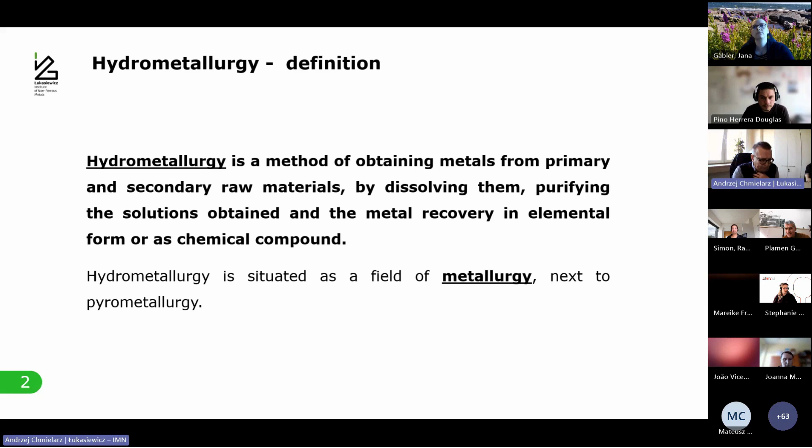We all know that hydrometallurgy is situated as a field of metallurgy next to pyrometallurgy. Hydrometallurgy, currently defined, includes several areas of basic and applied research. The first, which we will today be talking mainly about, is extraction or leaching and recovery of metals from primary and secondary raw materials. Next is separation of solution components via different techniques like IX, SX, precipitation, crystallization, membrane techniques, etc. Next area is electrochemistry in aqueous solutions, organic liquids, and molten salts.

Purification of waste solution with techniques of environmental remediation are included in hydrometallurgy too, and very important - mass production of metal salts and corrosion in aquatic environment.

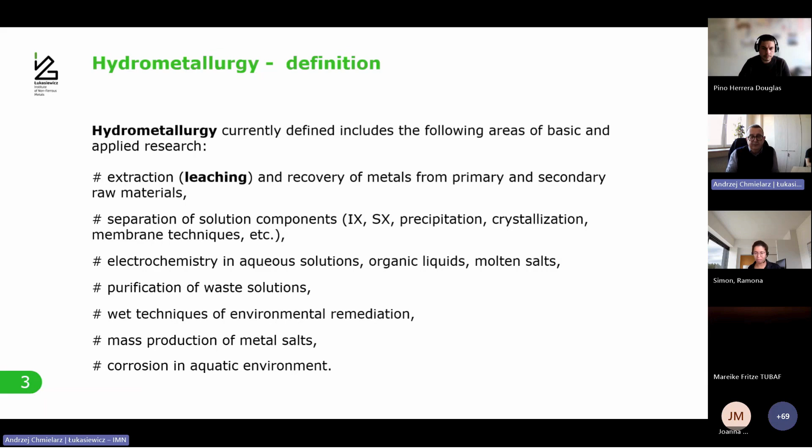Of the techniques mentioned here, leaching is special because it occupies the basic place. So let's go back to the definition for a moment and try to define leaching. Leaching is the operation of dissolution of solid raw materials in a liquid phase due to chemical reaction between components of solvent and raw materials.

I think there are two very important properties or parameters in this definition. The first is that we have to have two-phase materials, solid and liquid, and a chemical reaction must proceed between these components.

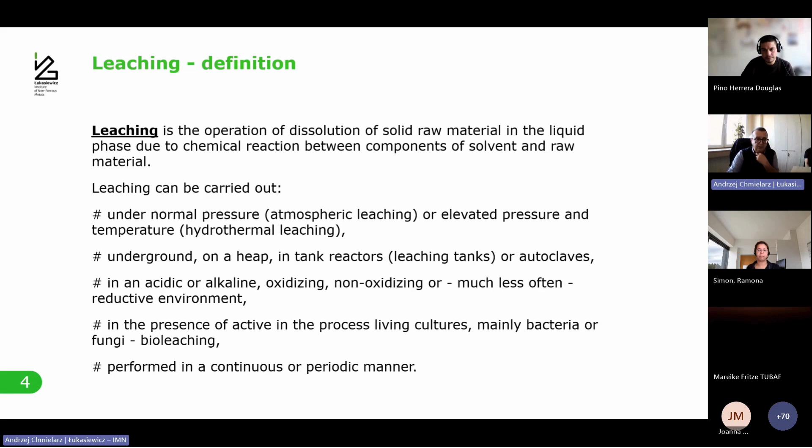Leaching can be carried out under different conditions: under normal pressure, when it is called atmospheric leaching, or elevated pressure and temperature, which we call hydrothermal leaching. You can do it underground, on a heap, in tank reactors, leaching tanks, or autoclaves, in acidic or alkaline, oxidizing, non-oxidizing, or much less often reductive environments, in the presence of active living cultures in the process, mainly bacteria or fungi - and in this case we've got a process called bioleaching. Leaching can be performed in a continuous or periodic manner.

Leaching, like any other technological process, is described by a group of technical parameters: composition of raw material and the leaching medium, ratio of solid to liquid phases during leaching or concentration of the slurry, temperature and pressure, leaching time - sometimes called retention time - and other hydrodynamic conditions. The result of leaching is usually determined by the composition of the obtained solution, unsolved residue and off-gases, leaching efficiency of the essential components of raw material, leaching balance, unit consumption of reactants, energy, and so on.

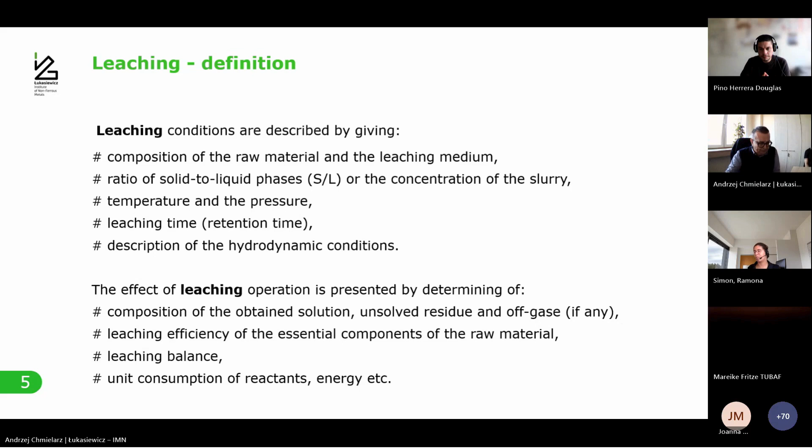So let's go to the basic leaching methods, starting with leaching on the heap. This technique is commonly used in production of copper from oxide type copper ores, and you can see on the left a simplified diagram of the operation. Raw material is built in the form of a heap after crushing and agglomeration.

Lixiviant solution is applied from the upper side, and pregnant solution is received from the bottom side. Sometimes air is pumped through the heap, especially when bioprocesses take a significant part in the whole leaching process.

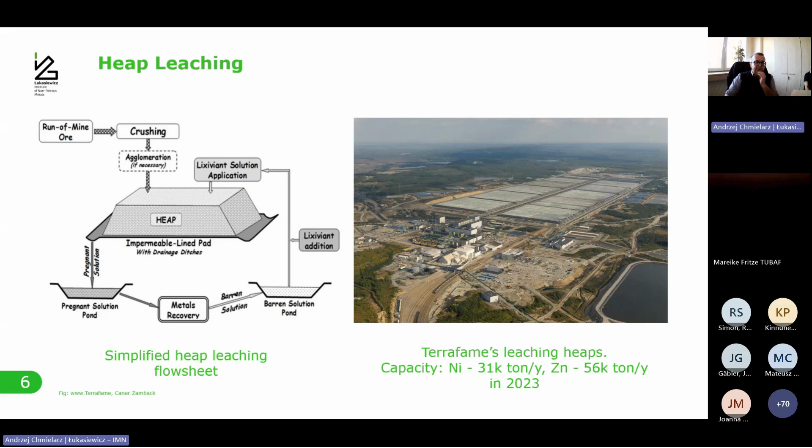Next, the most popular, tank leaching. Leaching is carried out in simple vessels equipped with a stirred agitator. Sometimes this vessel is equipped with a cooling or heating jacket, and baffles inside to improve hydrodynamics inside the reactor.

On the picture on the right, you can see a view of Cobre Las Cruces plant, which is one of the full hydrometallurgical plants, the second in Europe. The technology is based on tank leaching.

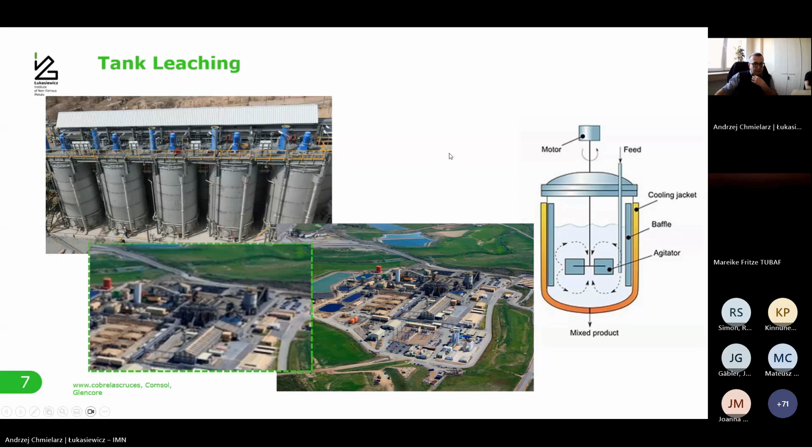Very interesting and technically not so easy to design and afterward perform is a process which needs three-phase reaction. It means that within the reactor we've got solid materials, leaching liquor, and the third gaseous phase. It is usually oxygen, air, or a mixture of air and oxygen.

Here we've got a tank which is used in the so-called Albion process. What is interesting in it is this nozzle through which gas is transported into the tank at over sound velocity. On the right side, you've got the next possible construction, very similar to a flotation cell with an aerator, through which air is added to the reaction mixture. This type of reactor was constructed in our institute, and they were, for example, industrially implemented to oxidize liquid coming from a sodium desulfurization plant.

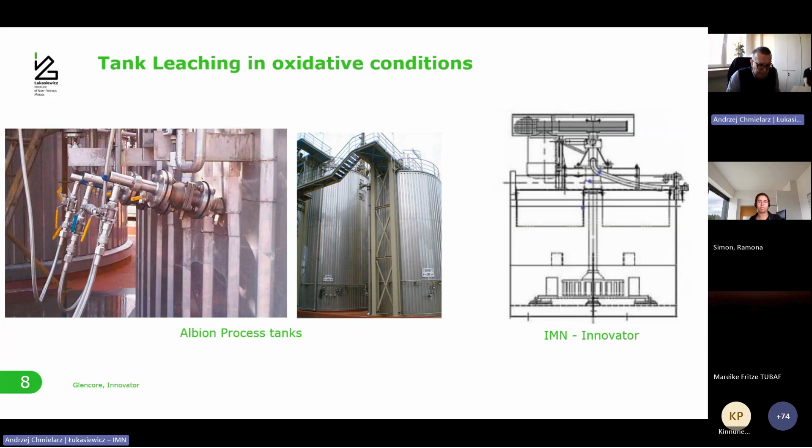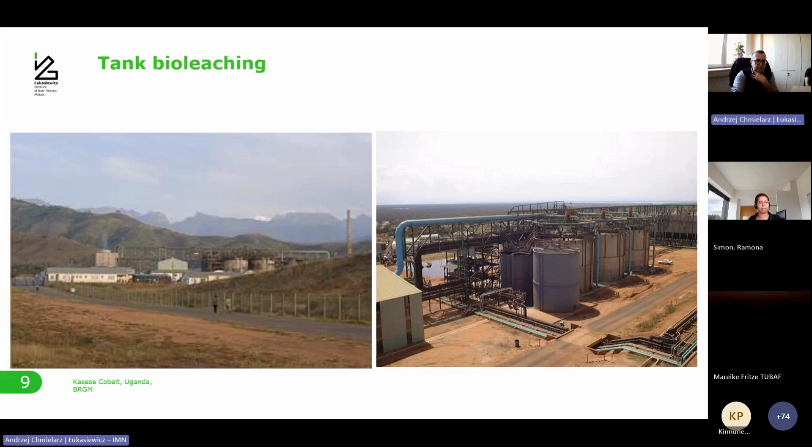And finally, hydrothermal leaching. The heart of hydrothermal leaching is always the autoclave. Here you've got the horizontal drum autoclave, in which the process takes place from the upper side: raw material and liquid are pumped into the autoclave. From the bottom, oxygen as oxidative agent, and steam for heating and to keep the proper pressure, are delivered.

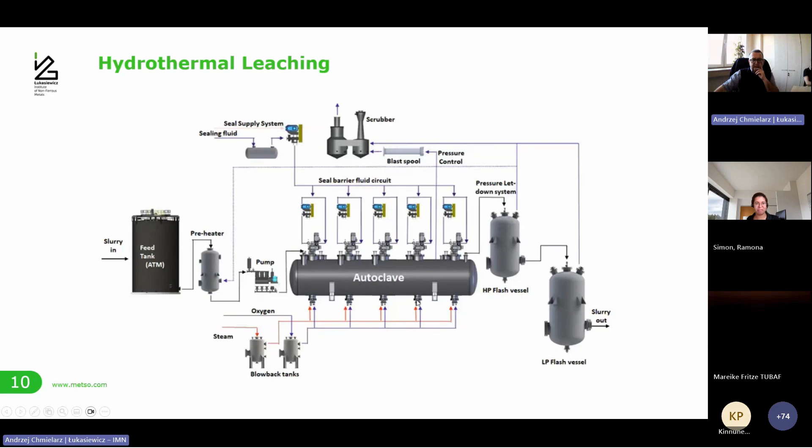Next, the pressure oxidation process is usually implemented in the gold industry for refractory gold ore, which means the main phase of the ore is pyrite, and before oxidation and leaching of gold, this pyrite must be removed from the raw material.

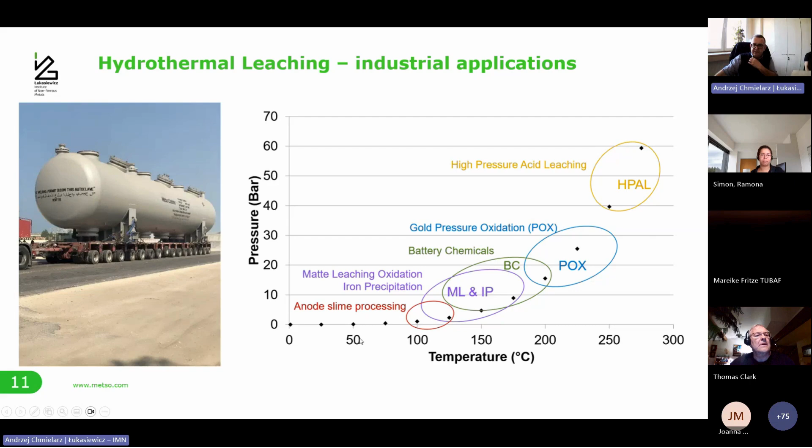And finally, as I said at the beginning, leaching tanks are used for batches, but if you arrange them in a series...

Short interruption. Maybe if we could come to an end quite soon. Yes, that would be great. Thank you, two slides.

And if you arrange them in a row, you can produce plenty of solution. This type is implemented mainly in zinc electrowinning.

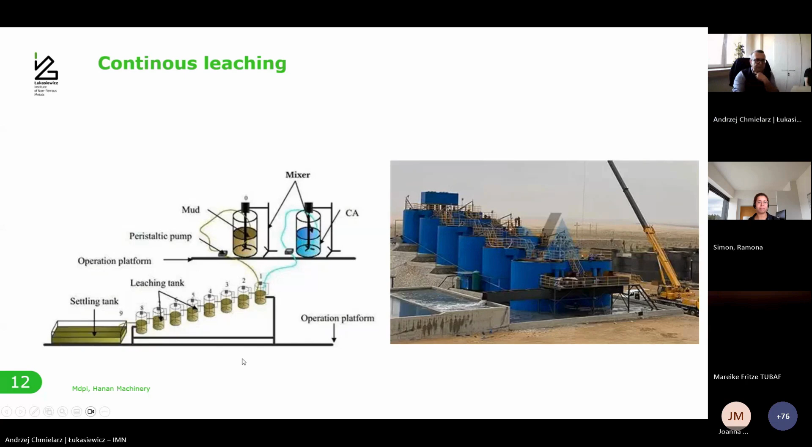And the last slide, on advantages and challenges for hydrometallurgy and leaching. As advantages, we can say that hydrometallurgy is high, but not always satisfactory, in kinetics of leaching and leaching efficiency. Leaching tanks are relatively simple in construction, especially those operating under atmospheric pressure, and there is virtually a very high limit on the volume of leaching tanks, up to 1,000 cubic meters.

In leaching tanks, we can conduct three-phase redox processes. And what is very important, it is possible to use polymer plastic as a structural material for reactors, even for temperatures over 100 degrees Celsius.

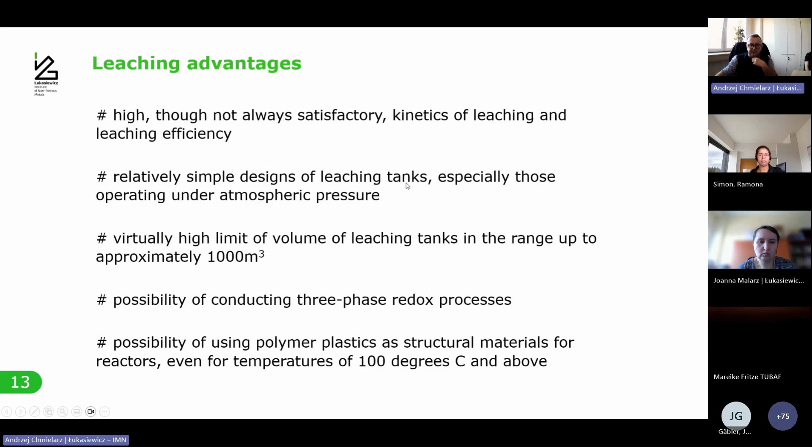And finally, challenges for hydrometallurgy and leaching process. The first is, in my opinion, reduction of cost of preparing the material for leaching. I mean crushing, grinding, and so on.

New designs of agitators and aerators are needed to minimize energy consumption, as well as development of high pressure, high temperature leaching.

And finally, we need, and it is, I think, a problem on the scale of the world, the development of methods to reduce the discharge of solutions of simple inorganic salts from wastewater treatment plants. This problem is a bottleneck even now, and can become a factor that significantly limits and sometimes eliminates the use of hydrometallurgical technology at all. Thank you very much for your attention.

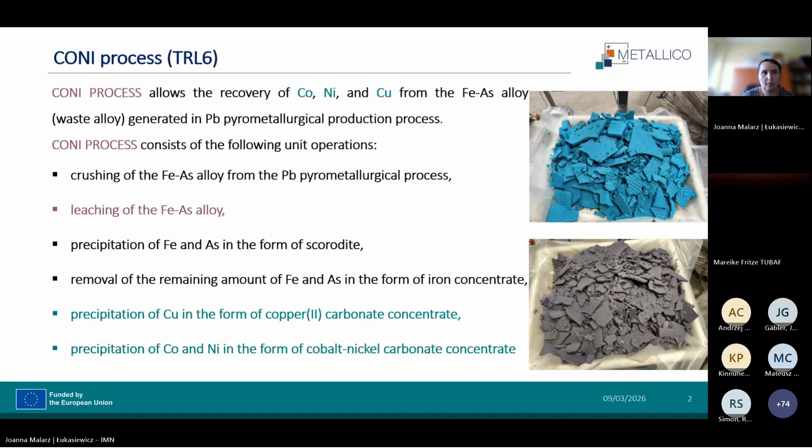The iron arsenic alloy is a polymetallic material composed mainly of iron and arsenic. A typical alloy contains about 40 to 55% iron and 25 to 35% arsenic. Because of its high arsenic content, this alloy is classified as hazardous waste and is usually deposited at designated industrial landfills.

The alloy used in our research contained about 55% iron and 24% arsenic, as well as around 7% copper, 2.6% cobalt, and less than 2% nickel. The main components of the alloy occur in metallic form.

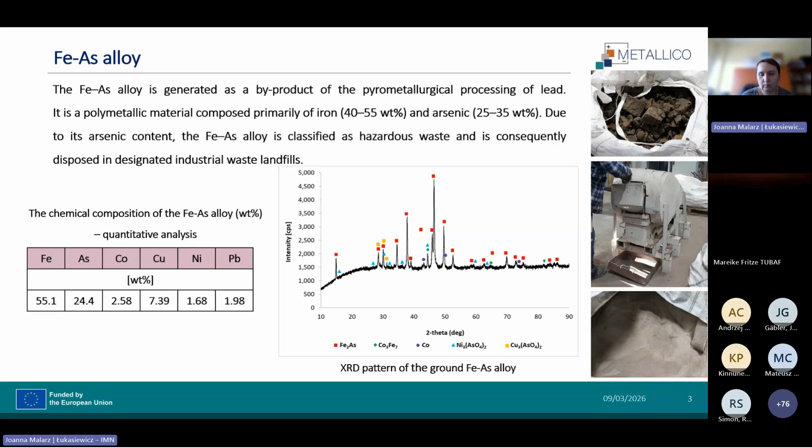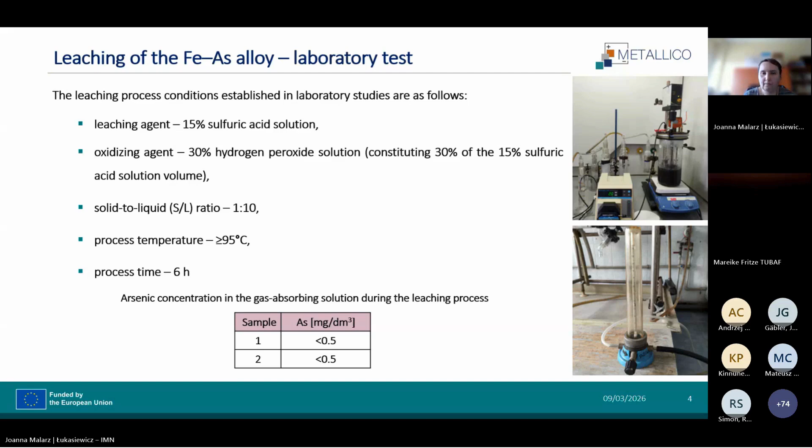Based on the laboratory results, the next step was the development of a pilot scale installation. The Łukasiewicz-IMN Institute supervised the construction and operation of the pilot plant at its facility. Some modernization of the installation was required to perform the pilot experiments. The most important upgrade was the purchase and installation of a new reactor, along with all necessary equipment. The pilot plant has a capacity of 100 kilograms per day.

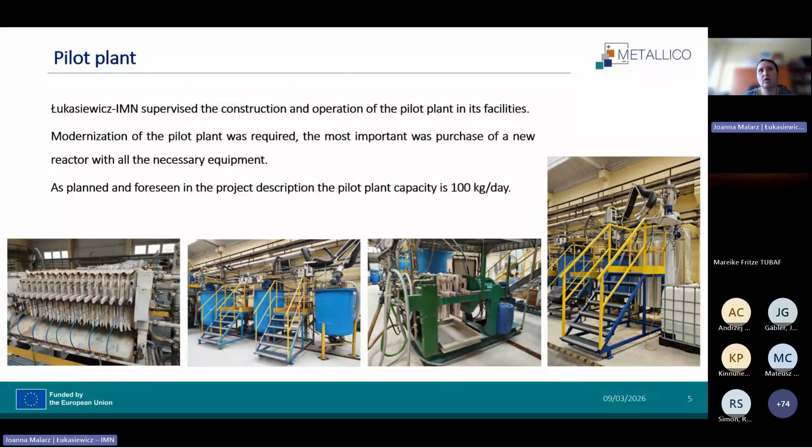When selecting the material for the pilot scale reactor, it was important to ensure high resistance to abrasion, high temperatures, and strongly acidic environments. Two materials were considered: acid resistant stainless steel, such as 316L, and a duplex alloy, for example grade 2205. They were compared in terms of mechanical strength and corrosion resistance under the expected process conditions.

Due to its significantly better corrosion resistance and mechanical durability, the duplex alloy was chosen for the reactor components in direct contact with the alloy and the leaching mixture.

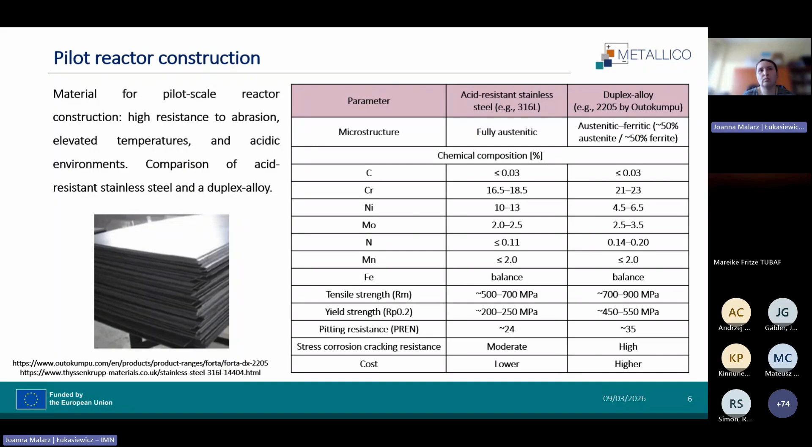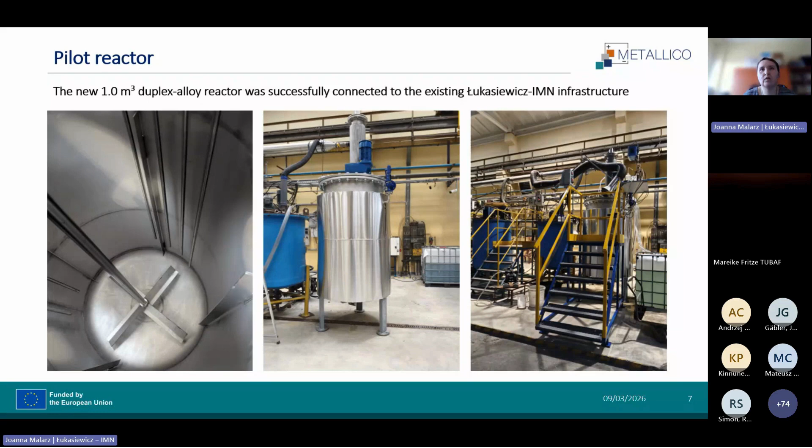A new reactor with a volume of 1 cubic meter made of duplex alloy was constructed and successfully integrated with the existing infrastructure at Łukasiewicz-IMN.

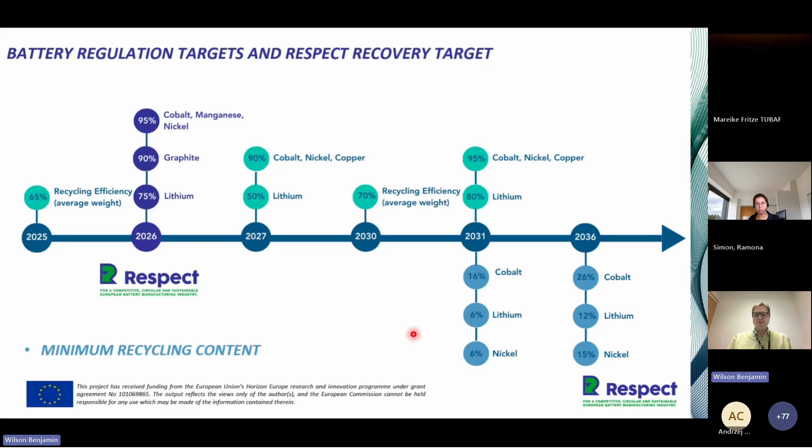So we're talking about hydrometallurgy here, as was explained nicely in the first two presentations - this is atmospheric on a lab scale. We use a 1 litre jacketed glass reaction vessel, with temperature control via a water bath on the outside. There's a 4-blade PTFE impeller with a 5 centimetre diameter and a 45-degree angle, providing the agitation that's quite critical for these kinds of processes. In this case, the stirring was provided overhead at 300 RPM.

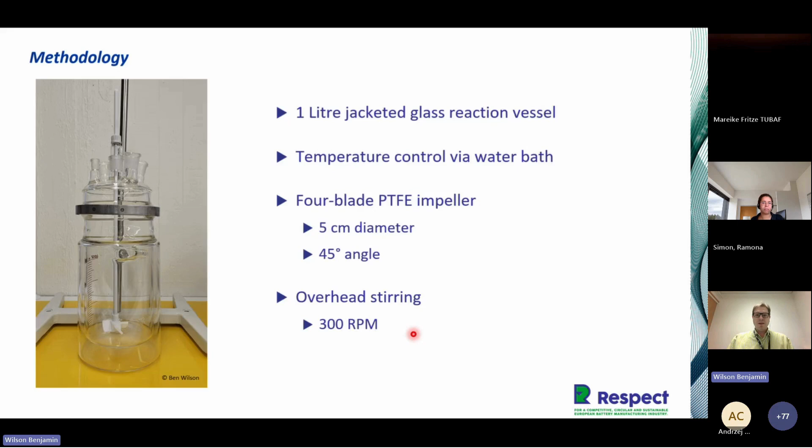What does that look like in reality? You can see it there on the left - there's some black mass being leached by 2 molar sulfuric acid, our lixiviant. It's an industrial black mass from lithium-ion batteries, NMC111, so nickel, manganese, cobalt in relatively equal proportions.

The critical thing mentioned as well is the solid-liquid ratio. The ratio we used here was 200 grams per litre, more reflective of industrial levels of solid-to-liquid ratios. The actual material had a combination of lithium, cobalt, nickel, manganese, but also copper, aluminium and iron. The last three particularly come from either the casings or the electrode materials, which are also within the battery elements, not just the active materials containing lithium, cobalt, nickel and manganese.

Part of this was to look at the process as a whole, and what difference the addition of reductants could make. We had a nice highlight from Joanna about the use of peroxide, but peroxide itself can be quite expensive and has a well-known high carbon footprint associated with its manufacturing process. So we tried alternative reductants - in this case iron sulfate, but also copper - that's recovered from the battery electrodes, exploiting materials like copper, aluminium and iron already within the black mass, so we don't have to add so much reductive material.

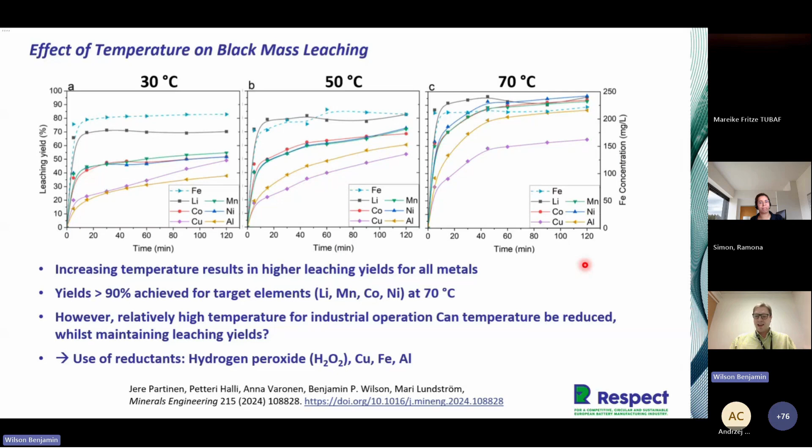Was that possible? Using reductants - hydrogen peroxide, as I said, currently has wide application in industry, but we're trying to look at whether copper, iron, and aluminium could have an impact as well.

So why these alternative reductants? Well, in fact, most of these NMC materials, some of it's quite easy to leach in the first instance, just with the regular acid, but some components of the NMC crystal structure are actually quite hard to break down.

So the idea of using the peroxide as an extra reductive agent, but actually the use of iron in conjunction with copper and aluminium can provide a reductive process as well due to this electron shuttling between the iron and the copper and the aluminium. So you can get some electron transfer, which causes the oxidation and reduction process to be enhanced compared to without the presence of these metals.

So this is just a quick overview of the kind of materials that we were looking at. So how did we approach this?

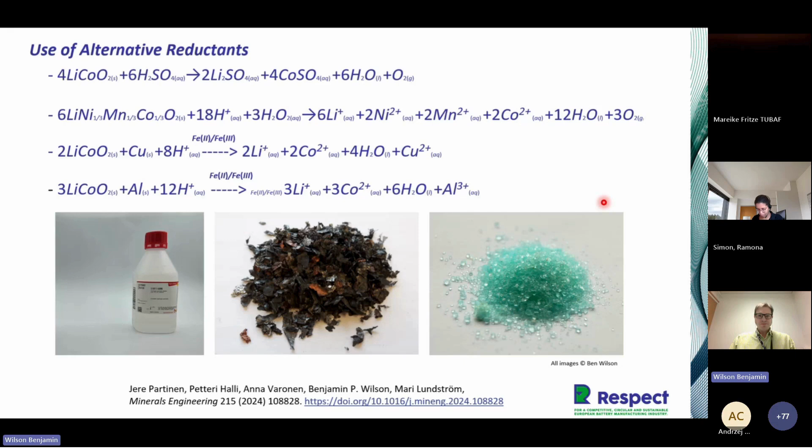Well, we took a design of experiments approach, also known as DOE. For those of you who don't know, this is actually a statistical tool. It allows you to assess the interaction of different effects between multiple variables. It's based on regression modeling, and it's used to construct models that, in this case, was looking at predicting leaching yields from our industrial black mass.

The parameters we selected for this investigation included temperature, the concentration of iron, not just what was already in the black mass, but what we added in terms of the iron sulfide and sulfate, and also the additions of copper and aluminium or peroxide.

And then the models were fitted with a partial least squares model. And you can design the sort of experimental protocol. There are programs to help you design this, so you can have different experiments with different levels of iron or copper and peroxide, and this provides you the information to base your statistical model on afterwards.

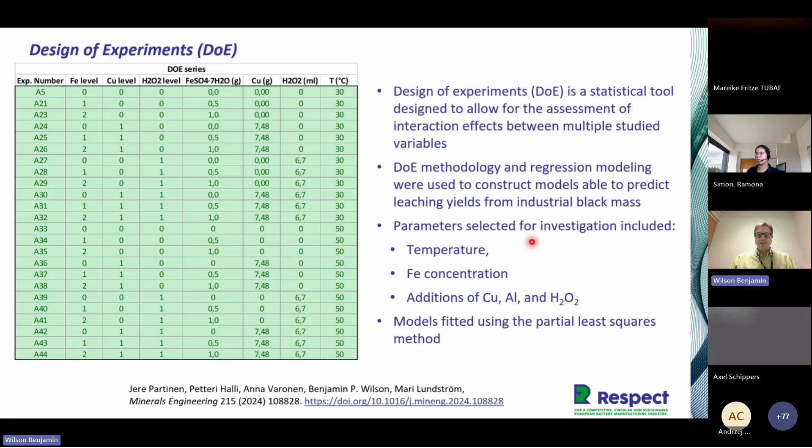Just a quick example, as we've not got a lot of time today. So just thinking about what we saw at 30 degrees without any reductants, the levels of leaching of the key metals was relatively low. But as you can see here, even at 30 degrees with the addition of iron reductant at 0.4 grams per litre or

0.6 grams per litre, there's been an increase in the leaching of the metals of interest, still relatively conservative, 50-60% for cobalt for example, but this is still an improvement at a temperature of 30 degrees compared to without any reductant whatsoever.

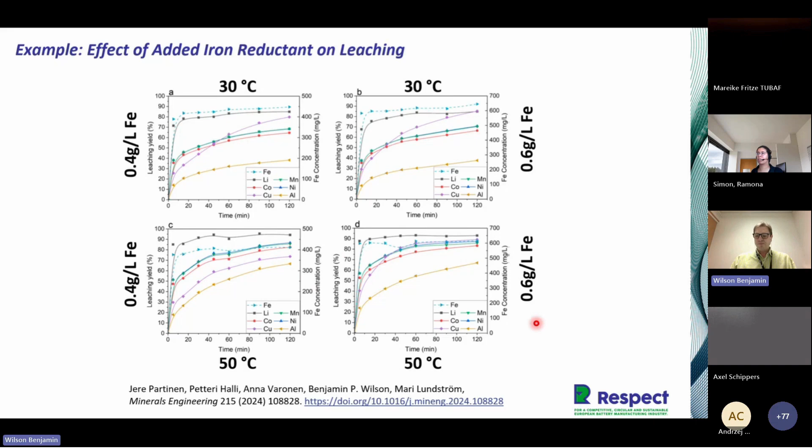But as you can see, once again, once we increase the temperature to 50 degrees, there's an increase in the amount of leaching yield or recovery of the metals into the pregnant leach solution that start to reach more appreciable levels up towards 90, the targets that we have there. So that was just a quick snapshot of the data.

Of course, we had a lot more data if we think about the table of experiments that was listed on one of the previous slides. But it was clear from our results that temperature is the most impactful factor for all the elements, thinking about cobalt, nickel, manganese and lithium in this case. And temperature was found to be especially key for lithium.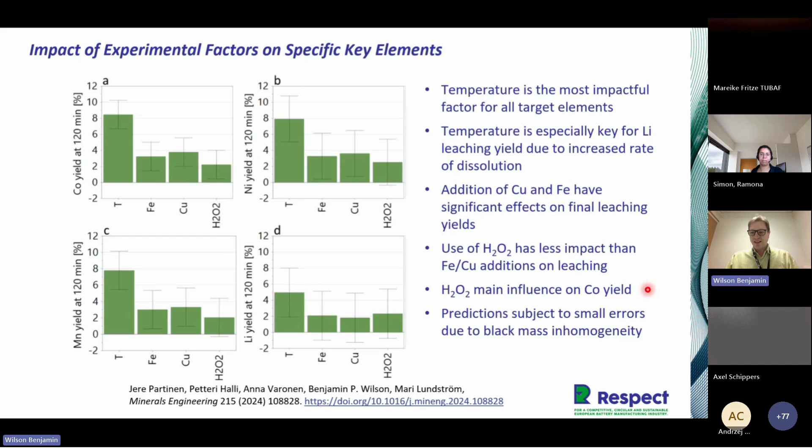But such predictions are subject to small errors due to the black mass inhomogeneity. Of course, black mass, it's normally in this case was 111, but it comes from different sort of input streams. So in fact, the amount of material in each yield varies somewhat based on that.

But what kind of results could we get out? Well, we can do some contour plots. This is for cobalt at 30 and 50 degrees, where we have copper and peroxide as the variables. In this case, the temperature was 30 degrees and the iron level was quite low at only 0.2 grams per litre. As you can see here on the left, the lines are almost diagonal. We have peroxide there on the left axis and copper amount along the bottom axis. And these are kind of like at a 45-degree angle.

So that would suggest, when comparing copper versus peroxide, that the copper and peroxide have similar impact on the leaching yields, at least after 2 hours at 30 degrees.

Whereas if we look at 50 degrees, you start to see a change from the 45-degree angle towards more vertical. This means that the peroxide addition actually has, at this temperature, only a weak impact on the leaching yields. So it's actually the copper addition that's having the most impact rather than the peroxide.

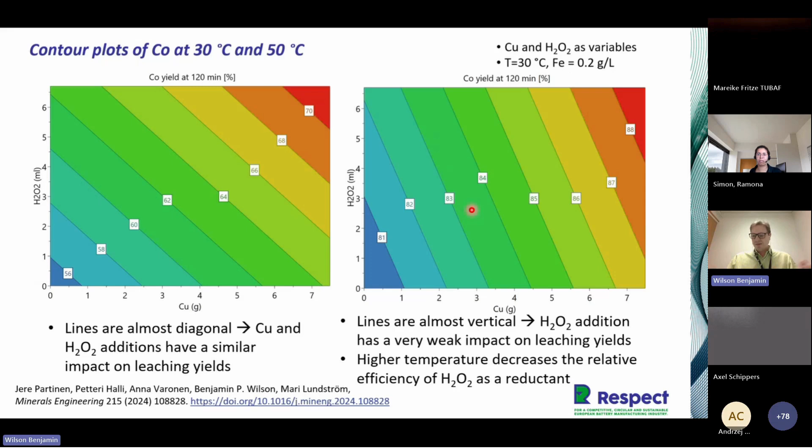And this is not a surprise, as higher temperature is known to decrease the relative efficiency of hydrogen peroxide as a reductant. So as you increase the temperature, the peroxide can actually break down rather than participate in the reduction of the cobalt or the NMC. It can just break down due to the temperature effects as well.

So just to finish with some quick conclusions. We showed that it's possible to make statistical models for the cobalt, nickel and manganese yields based on temperature, iron and copper as variables, and also peroxide.

These models indicate that copper additions could be more beneficial for improving the yield recoveries compared to peroxide, particularly at higher temperatures. It also shows that the metal impurities within the black mass can be used as a reductive agent rather than adding peroxide. So in fact, you can start to reduce the carbon footprint and also exploit some of these impurities within your black mass.

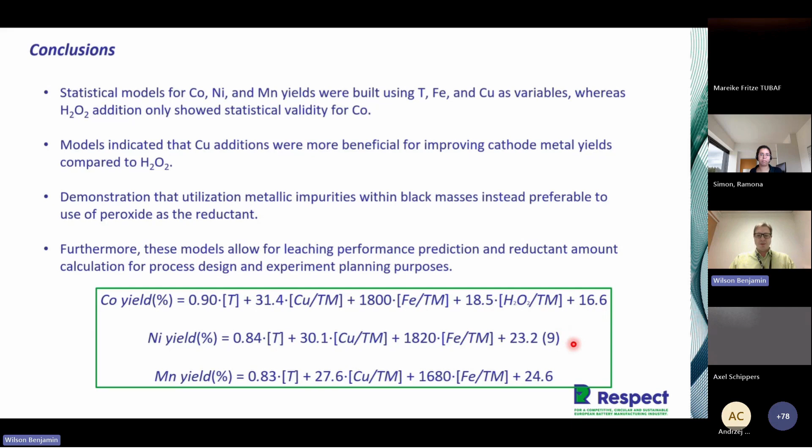So we're able to look at these models as a way of performing leaching performance predictions. This is based on NMC 111, but as you can see from these equations we now have based on the models, it is possible to take an NMC, maybe 532 for example, and then calculate, based on the different temperatures appropriate for leaching, what kind of yields would be applicable from this new material based on the models.

So a quick tour there for you about the RESPECT project, but if you have any questions, of course, we'll be happy to answer them later. Thank you very much.

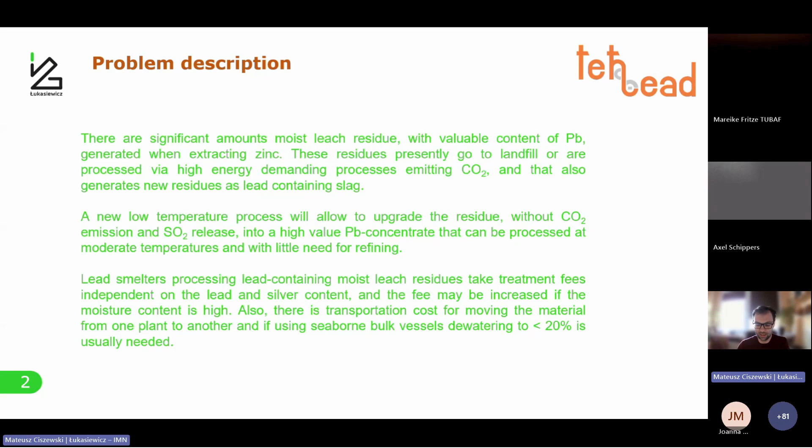Yeah, it's not. So, general description: what was the problem and how we solved it? Generally, there's a significant amount of leaching residue produced that contains a significant amount of lead, and these leaching residues, in our case from the zinc industry, are either disposed of or landfilled in some cases, or they can also be processed by lead smelters, but this involves additional fees concerning the transportation of the quite heavy and moisture-containing materials. So the objective was to develop technology that could face this problem and recover this lead.

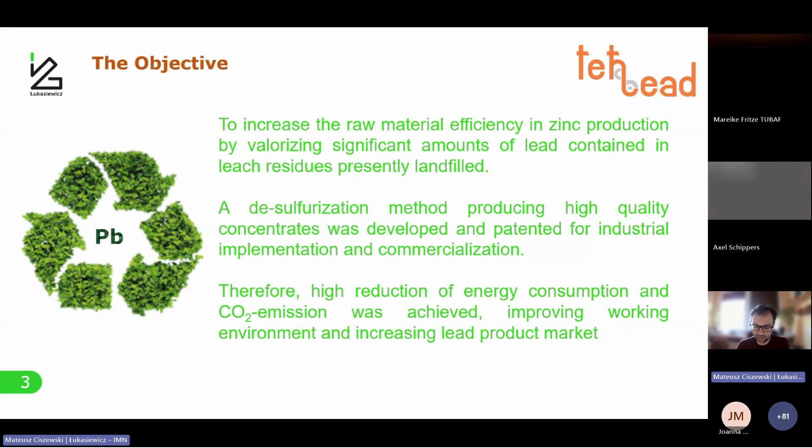We used the so-called desulfurization method, which allowed us to diminish energy consumption and the negative impact of emissions of toxic gases.

So our magic substance was TETA, that is triethylene tetraamine, which is a quite powerful extracting agent, very selective toward lead sulfate. Other lead compounds are quite inactive, but for lead sulfate, the water amine solution allows extraction of lead sulfate to the liquid phase, to the aqueous phase.

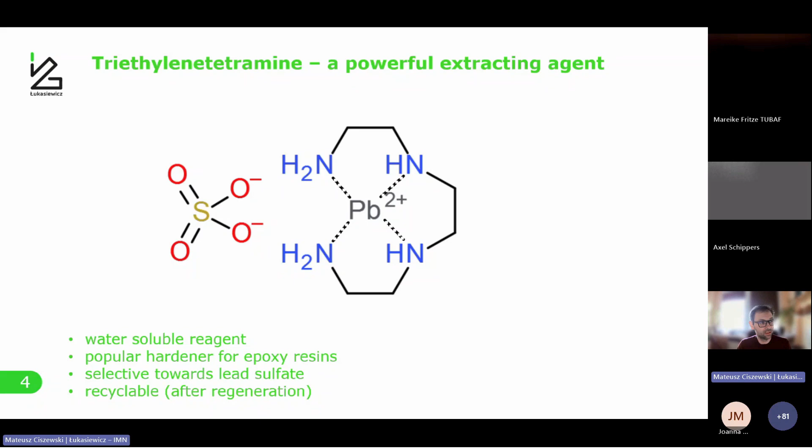Another thing is that this technology is quite recyclable, and for those of you closer to polymers, TETA or triethylene tetraamine, or a mix of other alkyl amine solutions, is a popular hardener for epoxy resin.

So that's the general idea. If we find that lead in this zinc leach residue, in our case, is in lead sulfate form, or generally other materials that possess lead sulfate, it can be treated with TETA solution.

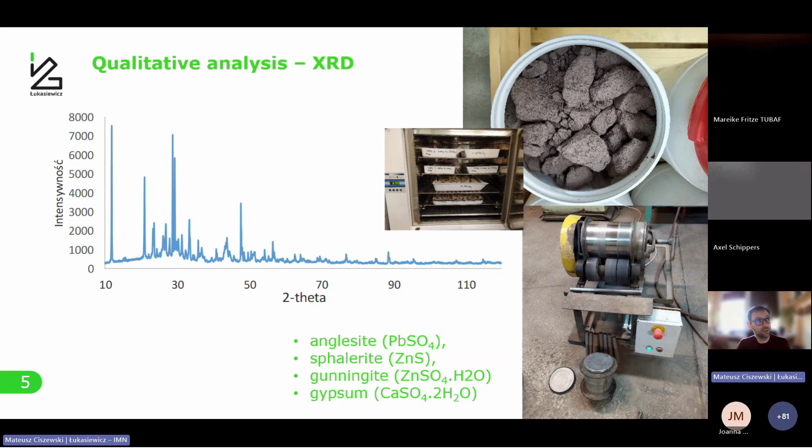These are some photos from our lab scale experiments, including grinding analysis, drying and so on. We also did this in the pilot scale, and I will show you how it looks. This is the general technology for recovery of lead.

So if you have SHAL, in our case from super hot acid leaching from one of the smelters in Europe, first is leaching using an amine water solution, so the lead sulfate is extracted to the liquid phase. Then we have filtration, so other materials are left, then carbonation.

If you purge CO2 gas through this solution containing amine with the lead sulfate molecule, you will obtain lead carbonate, which is the main product of the technology.

In this step, you have a quite big amount of CO2 dissolved in the solution. So the best idea to remove it is to acidify it with some amount of sulfuric acid, so you have desorption of the CO2.

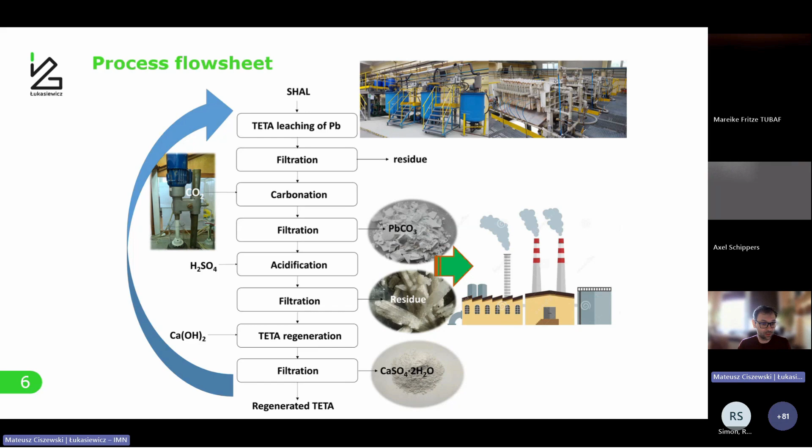The last step, quite challenging but also very positive for the whole technology, is the removal of excessive sulfate ion, which allows regeneration of the triethylene tetramine water solution, which can then be used for another leaching operation.

Carbonation in the lab scale was done in a flotation machine with a proper volumetric flow rate of carbon dioxide. In the pilot scale, it was done not in a beaker but in a big 3 cubic meter reactor. In lab scale, we checked it after every 15 minutes.

The filtrate was checked to see whether lead ions were still present, which is how we found at what pH this depletion of lead ions is practically finished.

The regeneration scheme is based on the main reaction tank, which is supplied with the solution after carbonation and after precipitation of lead carbonate. This solution, with some increased amount of sulfuric acid, passes to the reactor.

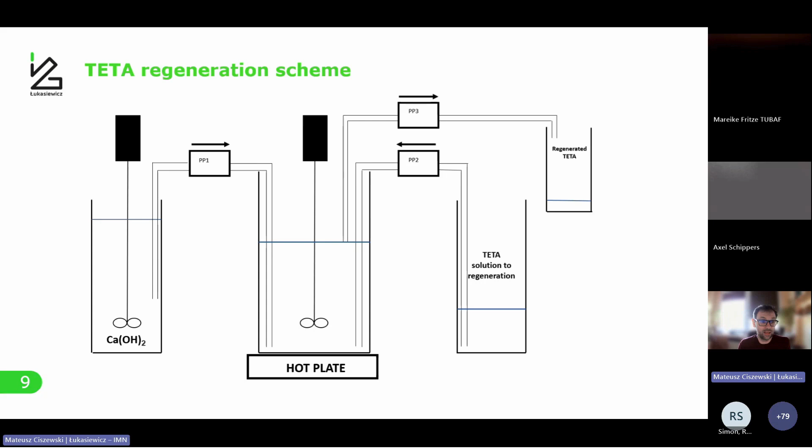So we came up with all these parameters for the process: the time, the temperature, and so on, the agitation as well, and it allowed us to pass from the lab scale to the pilot scale installation.

As you can see, there are 4 main reactors. This was done at our premises in IMN, Institute of Non-Ferrous Metals. The leaching reactor for the SHAL leaching, and the carbonation reactor for purging CO2, the biggest one at 3.5 cubic meters.

Acidification, just to add concentrated sulfuric acid to dissolve and evolve carbon dioxide. And the last one, steam heated by a heating mantle, the 4th reactor for regeneration, producing gypsum and regenerating TETA so it can be recycled to the beginning of the process.

Of course IBC containers for any buffer solutions were there. In every operation, though this image is quite small, we generally used semi-industrial filter presses containing a number of chamber plates.

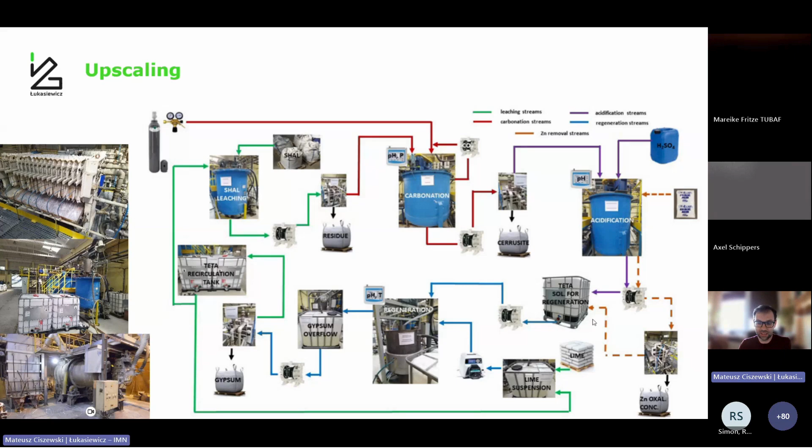From time to time, there is an additional zinc removal or zinc extraction operation that should be performed. So, shortly, conclusions about this technology: the amine allowed us to recover 90% of the lead from this super hot acid leaching.

This triethylene tetramine water solution can be successfully applied for other solid materials containing lead sulfate. The technology allows production of pure, high quality lead carbonate that can be used for smelting.

This was also done in our case. Our colleagues from the pyrometallurgy department smelted close to 1 ton of the lead carbonate to produce lead.

Amine regeneration has to be performed with acidification, that is for sure and must be. We also propose some membrane technique to remove excess water that can be done during recirculation, during continuous operation, when there's an income of water, for example because of filtration or washing filter cakes.

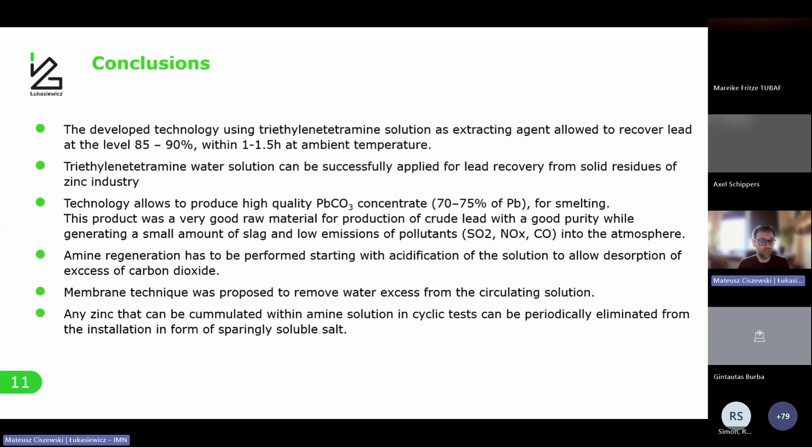And the last thing, any zinc that can accumulate during operation of the amine technology can be periodically eliminated. This technology for elimination was also developed in IMN, as a sparingly soluble salt. So, probably it was quite short, but thanks to all of you for listening.